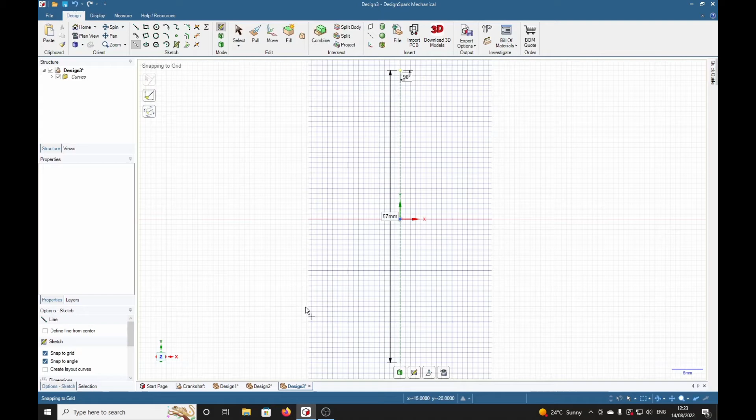And the first thing we're going to do is set up some center lines. That gives us a full screen of grid that I can see. And the first thing we're going to do is draw a circle, which is going to be 60 millimeters diameter, and another circle down here at 25, and then we're going to make that one diameter 24.

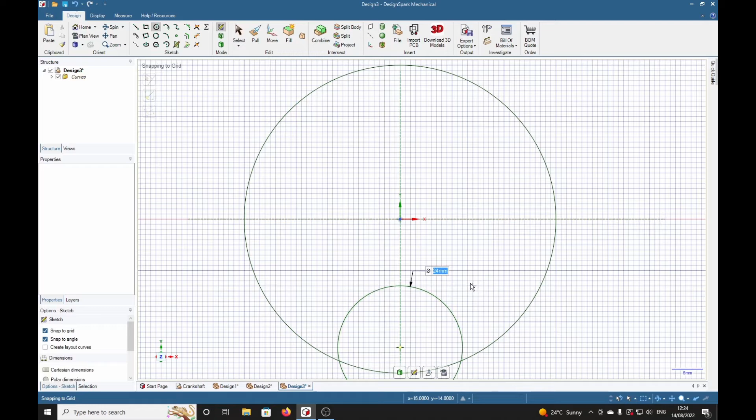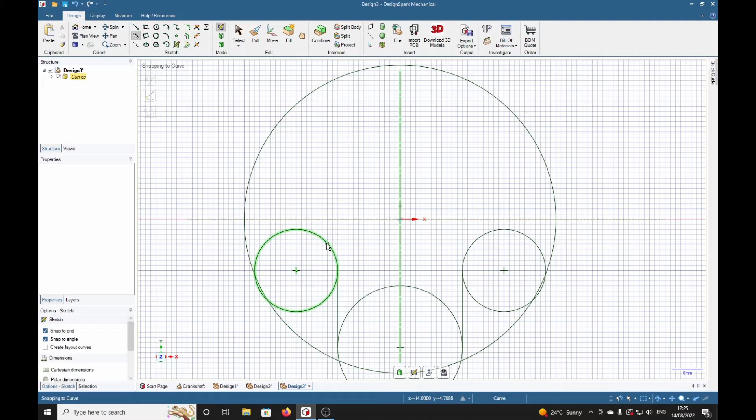I'm going to right click here and make this into a mirror line, so that when we now do this circle, it duplicates it over here. Now straight line, choose a straight line in the sketch panel. We've got two vertical lines here. Now we want another one, this time a tangent line. We want a tangent to this circle. So we click, we see two parallel lines here, and we click, and around about there is the right angle

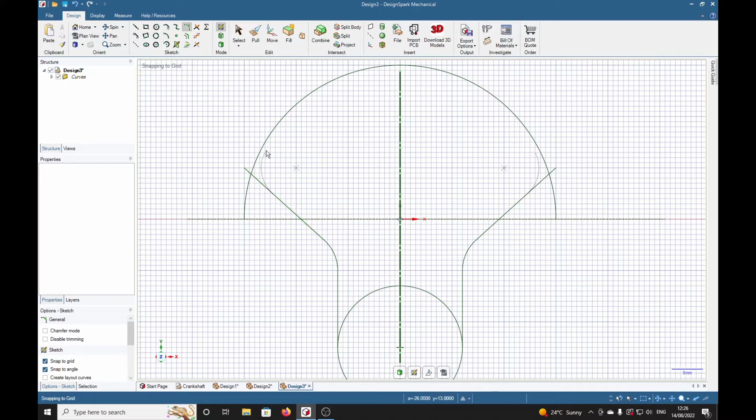that I want. I'm going to press the T key for trim. Now I can trim away some parts of this. There's a bit there. There's a bit there. Now I want a radius on here. So we'll select create rounded corner and type 10, return. T for trim, don't want this piece here. Let's get rid of that. Now there's our crank shape.

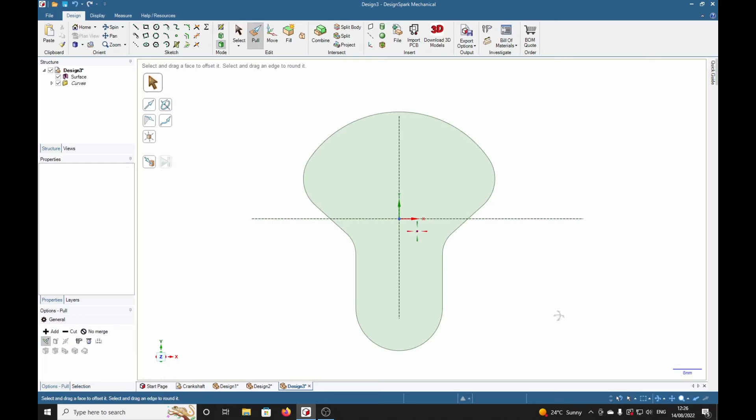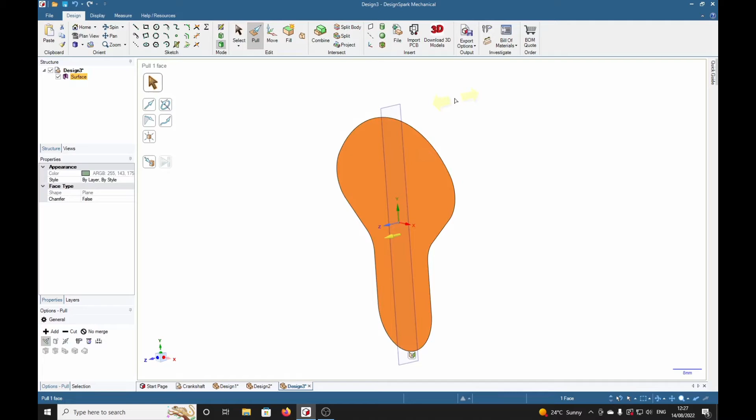Press the P key for pull. Select. Now we do not want this plane in here, so we'll select over here and press the delete key. Got rid of that. I believe it's still here. Select it and delete. At last we've got a shot of it. With the pull tool we can now select 12. That looks a bit too thick. I'm going to make that 10. Right, that's better.

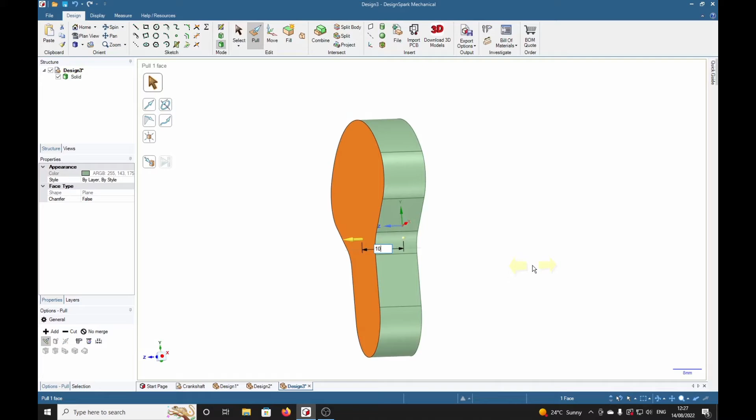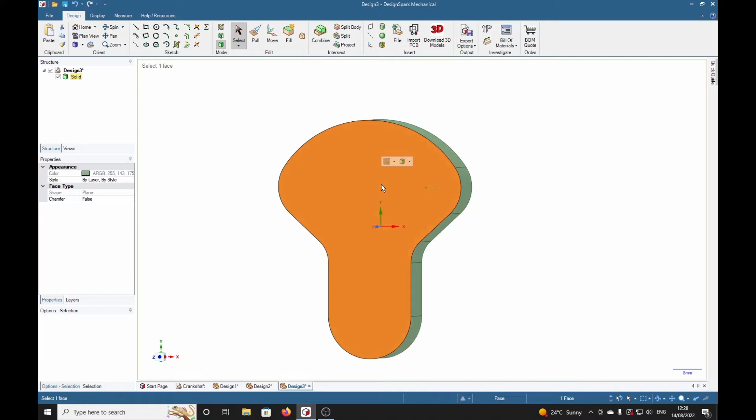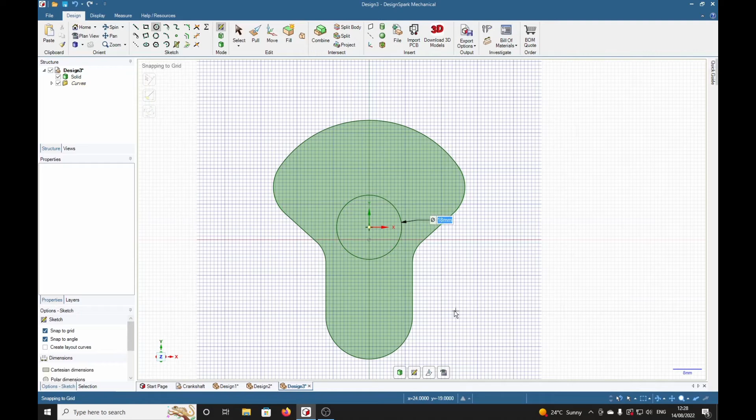Now I want some bosses on here. One for the main shaft and one on the other side for the crank pin. So with the select tool selected, select that face there, V key squares it up. Now we're going to create a boss on here. Now if we touch this curve here, it gives us our central point. So we click on here, make 18mm circle. P for pull tool, select, type 2 for the thickness, boss there, 2mm thick.

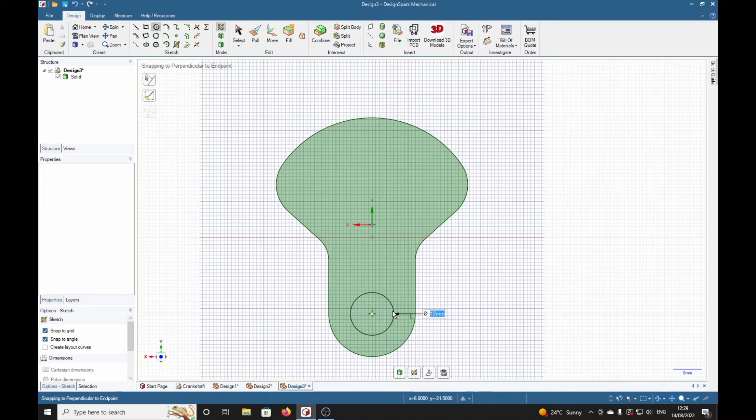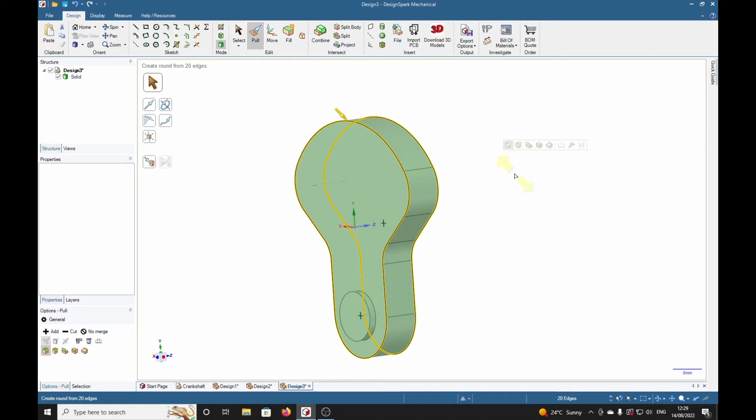S for select, click that plane, V for vertical or square up, and again we're going to draw a circle on this. You see there's the center. 14. P for pull, 2, that's the basic crank. We'll put some nice rounded corners on here. Pull tool selected, double click and control double click, press 2 millimeters, return, select that there, control click, select that corner in there, 1, return, there's a crank with 2 bosses.

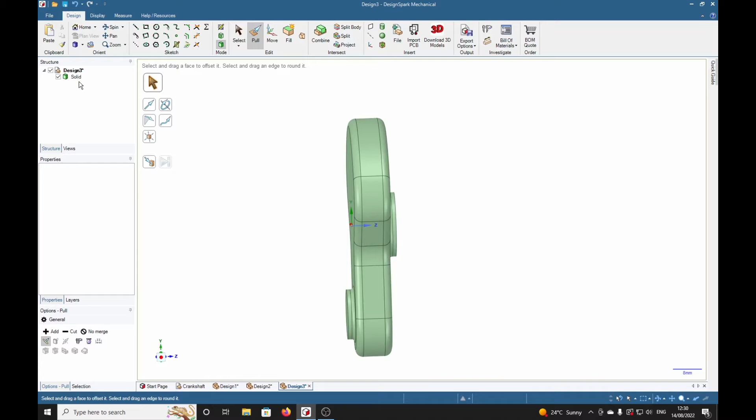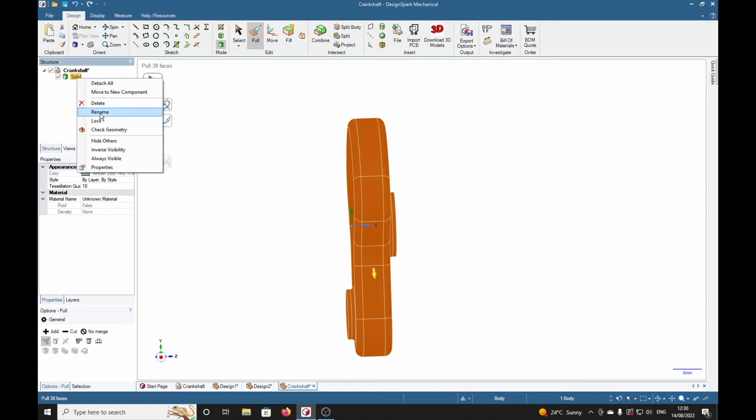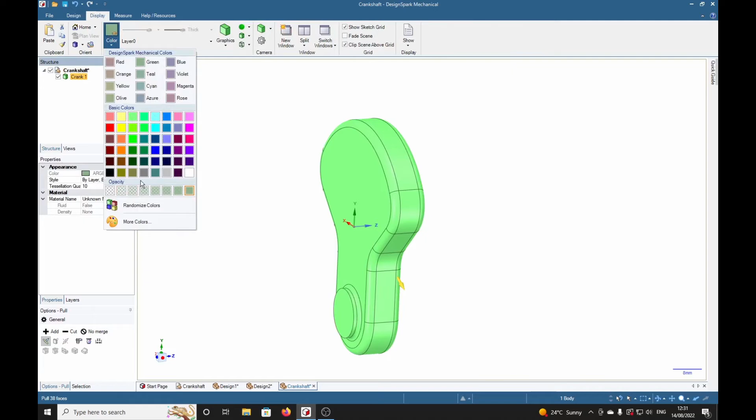I'm going to start renaming things over here. First of all, rename. Right click, rename. I'm going to call it crank 1. Now we've got a green crank. Let's make it look a bit more realistic. Select the crank, display, color, darkish grey, dark green, yes. That should be a matte colour. Metallic finish.

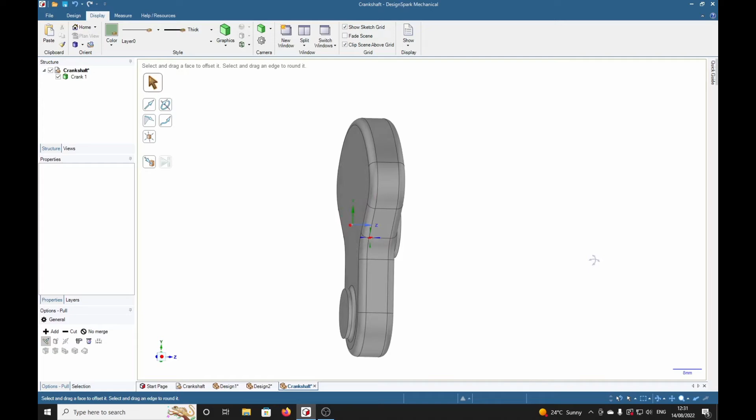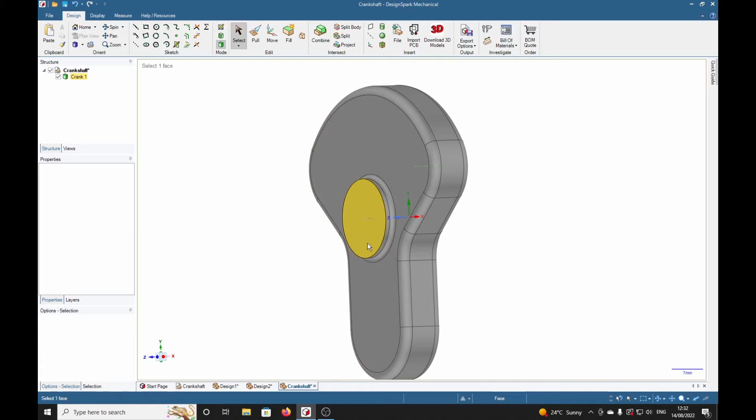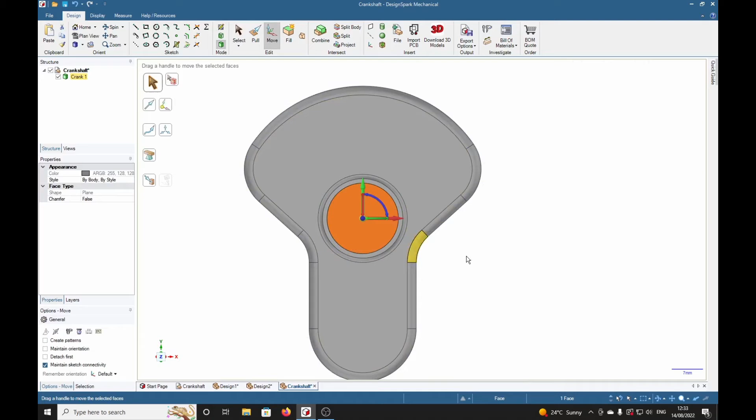Now the next part of the process is to make the bearing parts. The shaft stub will come off here and the crank pin will come off here. So we'll go to design and select here, V, circle, 16mm. Okay. P for pull or M for move. Select that. I'm going to move this area away from the crank because we want to avoid this pin becoming part of the crank. We want it a separate item. So now that it's not connected to the crank, we can select the pull tool and make it into a bearing.

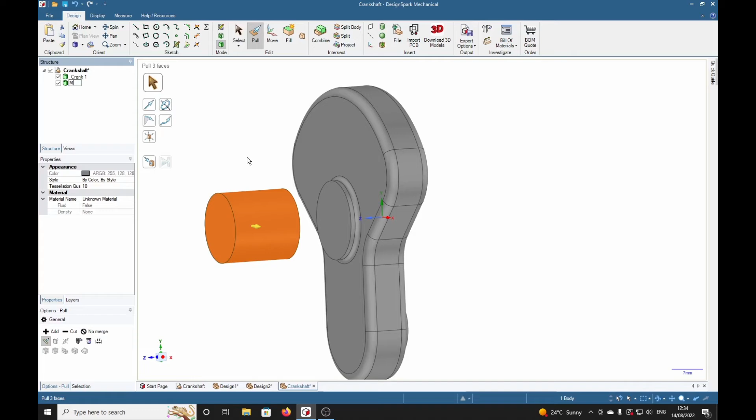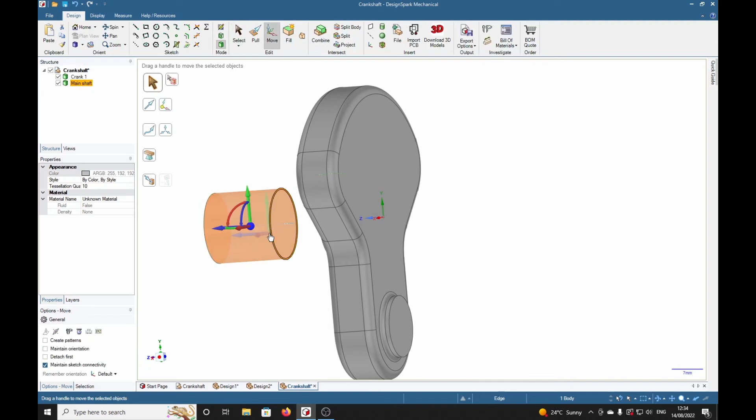Now how long are we going to make it? We'll make it 16. So we're going to call that, rename, main shaft, and we're going to give that a nice shiny colour. So this time we're going to be light grey, metallic finish, high gloss. So select the main shaft, move tool, drag the hub of the anchor to that face, select up to, and bring it up to that.

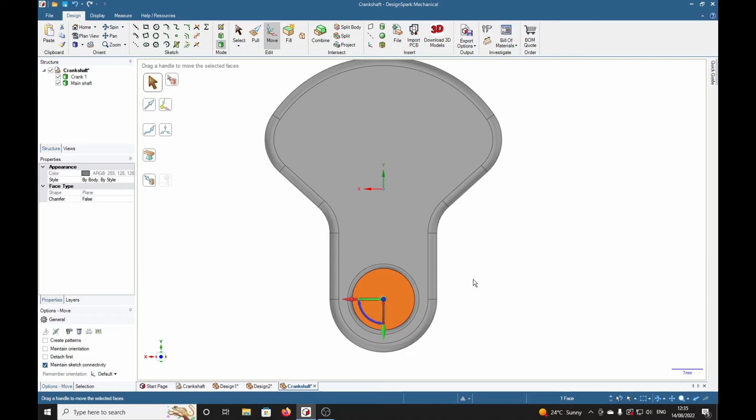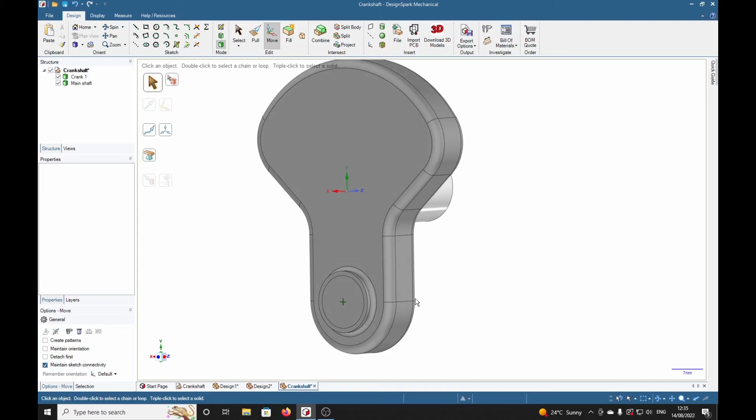Now we just repeat the process for the crank pin. S for select that face, C, sketch circle, and we're going to make that 12 millimeters. M for move. D for design mode. Move it away. Pull. And I'm going to make that 13. Use the same process.

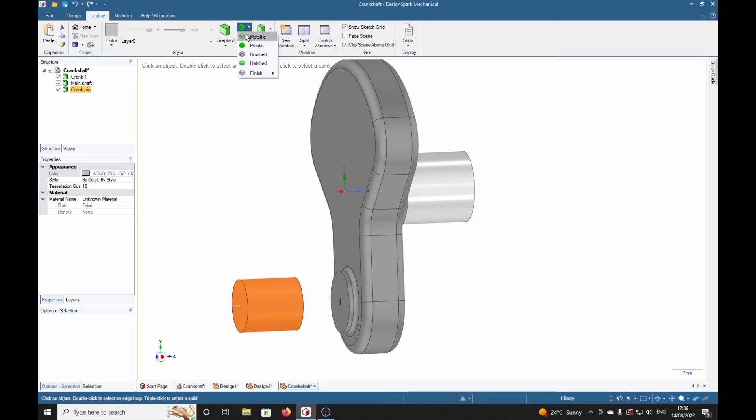To colour it, first of all I'll change the name, rename, crank pin. Display colour light grey, metallic, high gloss. Crank pin. M for move. Shift the anchor point to that face. Up to tool to there. Starting to look like something.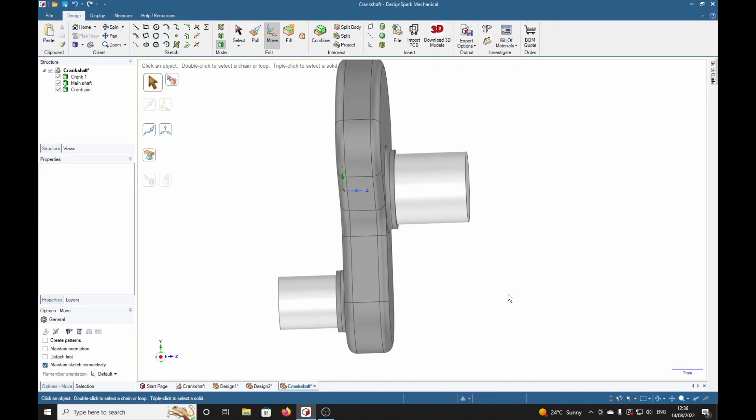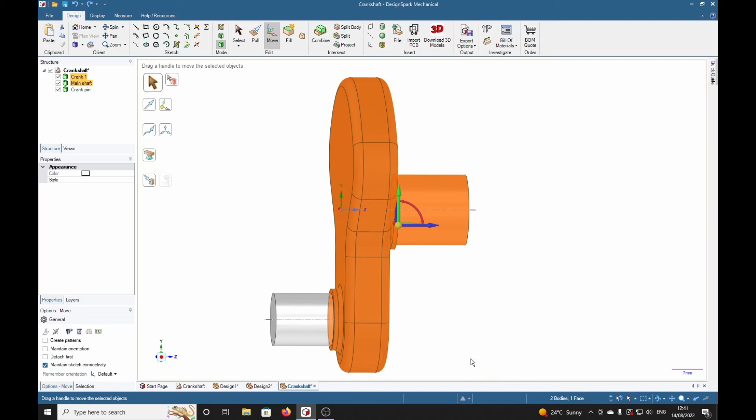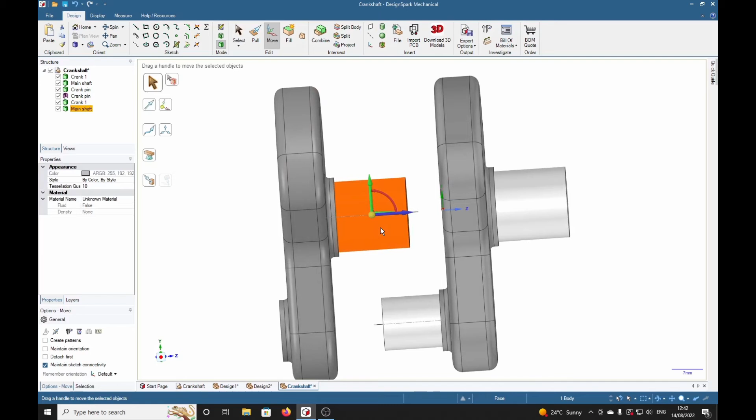And to complete one crank, we need to duplicate this and stick it onto here. So we'll use this method of highlighting this bit. Hold the control key, we're on the move. Move that to here. Turn this around, 180.

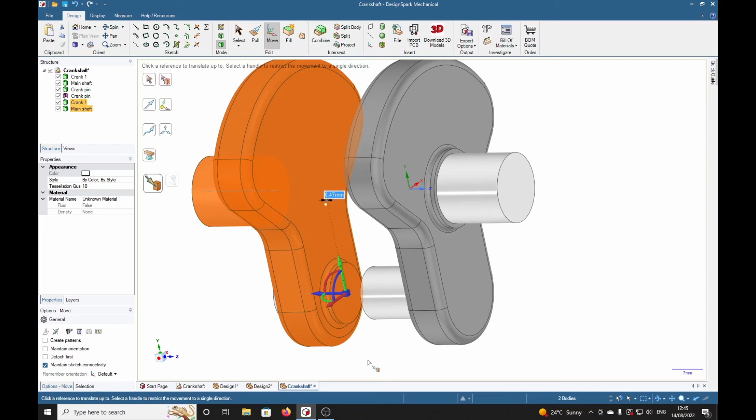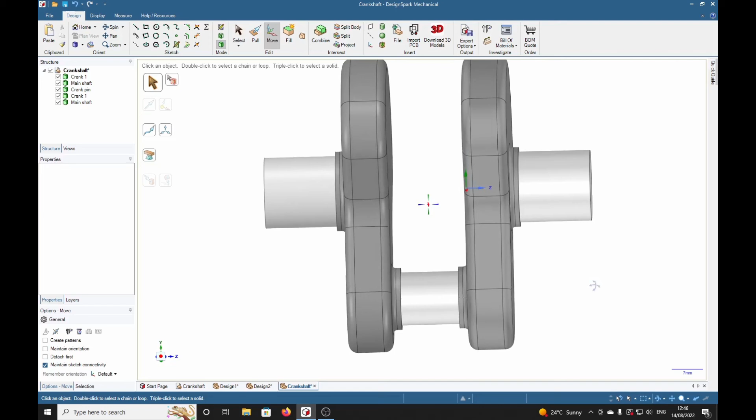Now I don't know if this is fitting right here, so I'm going to drag the whole lot off. No, it's not. Right. So we'll position it by dragging the hub to this face. Select the up to tool. Select that face there. That's it. There it is. Now we've got a spurious surface there we don't need, which is this surface here. So I can select that and delete it with the delete key. So there we go.

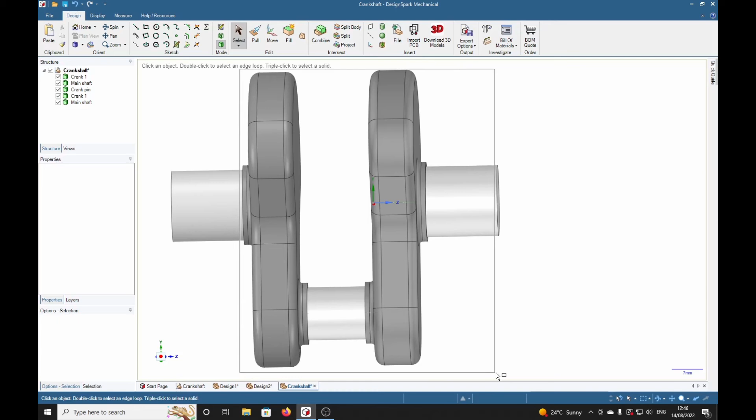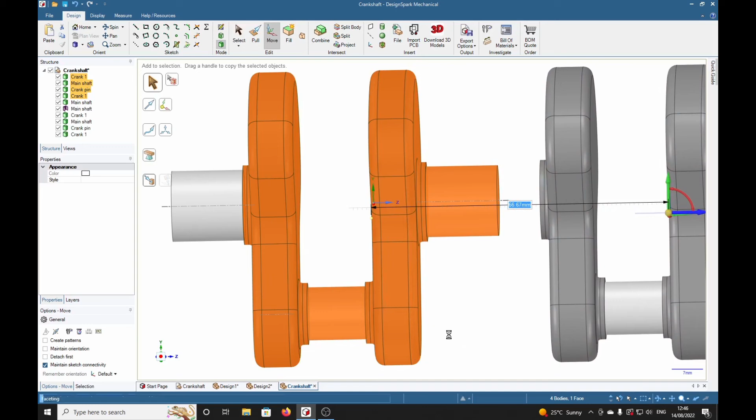Now that we've got that basic crankshaft modelled, if we want to make a 2-cylinder job, what we can do is go to select and see if we can select all of this. Yes, so that's everything but this main shaft here. Okay, then move, control key held down, then click and drag. Rotate this 180.

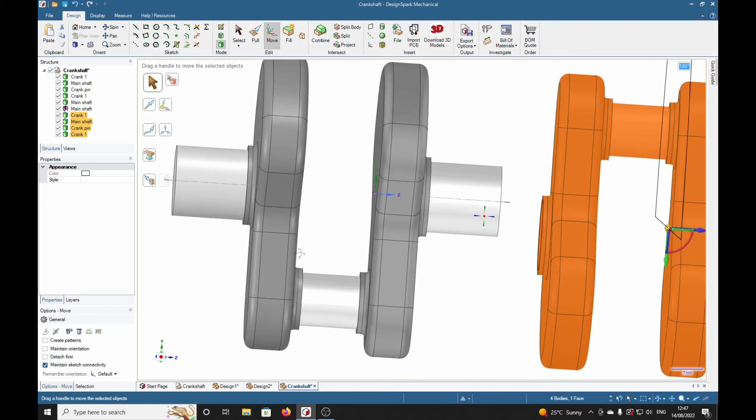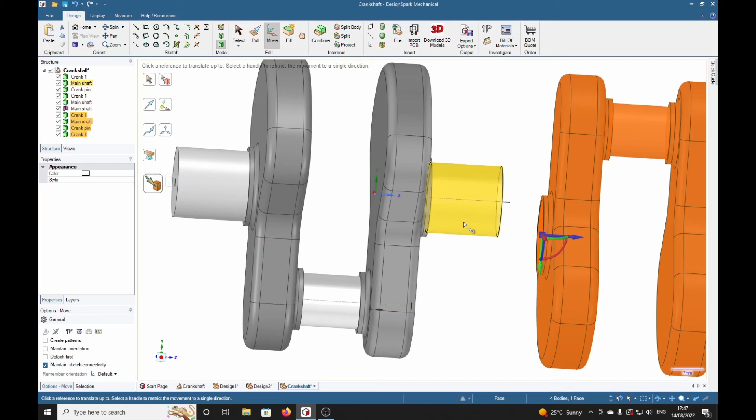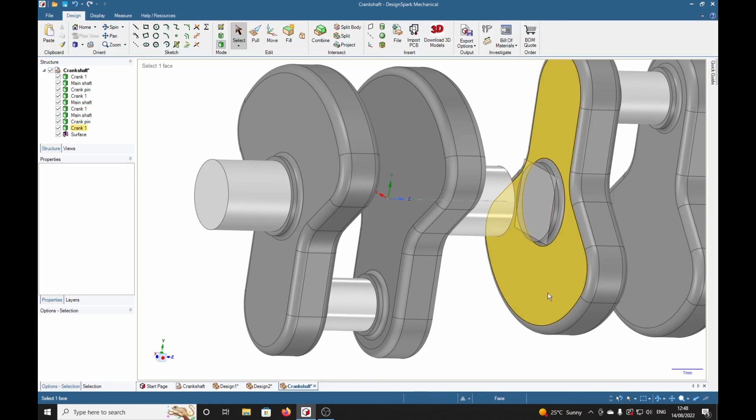Now see, obviously this boss isn't concentric with that one. So to achieve that, drag the hub to that edge face there, we see that it's in the middle of that boss, up to, select the surface of the shaft. Okay. Now we seem to have the surface here. I don't want that. So if we go to select that and delete that line. Oh, we've got a little surface there again. Get rid of that. Delete. There we are. That's better.

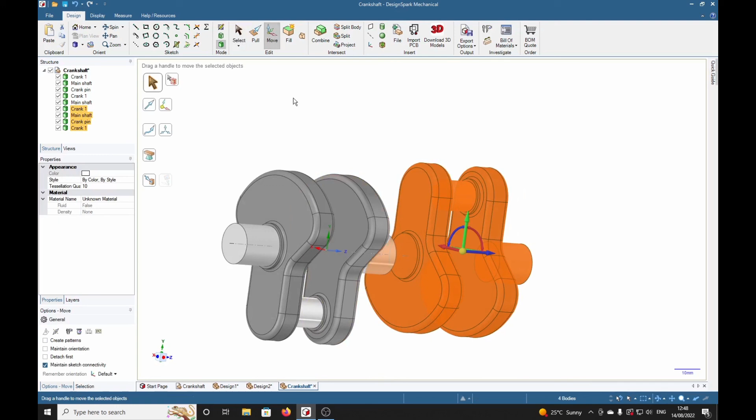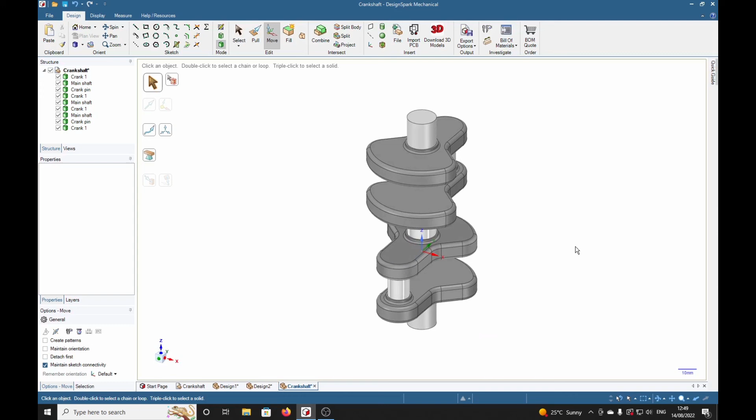So now we can select all of that. Move. Drag to there. You are, dear friends, the basic crankshaft. You should have most of the tools now to be able to make one the size you need.

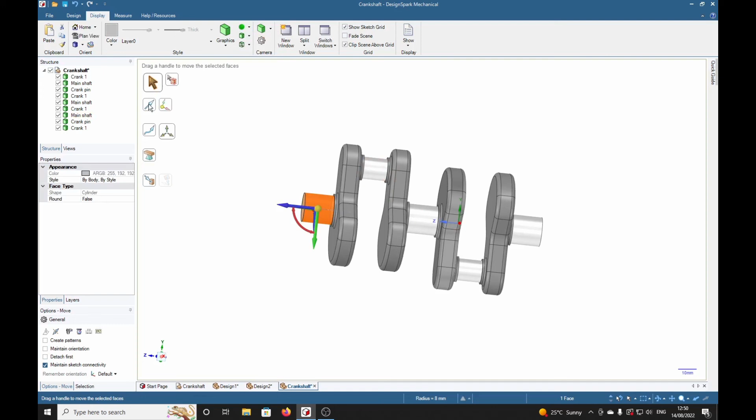So I've just spotted something here. For some reason that one isn't quite as shiny as some of the others. I wonder. I'll just select that. Go to display. See what finish it really is. You see it's medium gloss. I'll select metallic first, then go to high gloss. That's better. That one also. Doesn't appear to be right, yes. That one. Oops. That was better.